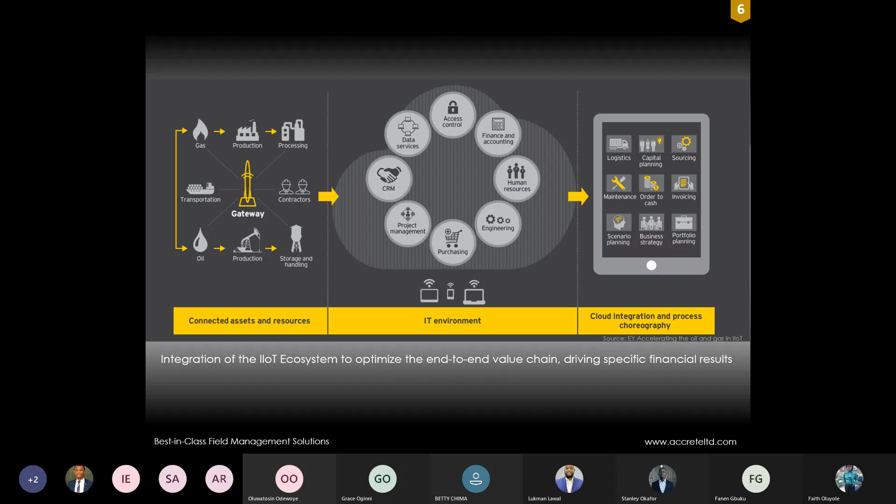So like I mentioned earlier, the common drivers for the move towards digital solutions in the oil industry have been, one, cost savings, right? And one of the key drivers for this drive towards operational cost savings has been low oil prices in recent years, and in a bid to reduce the cost of carrying out these operations, automation actually is one of the key drivers and one of the key tools that the industry is adopting in reducing the cost of operations, right?

So other added benefits of that would be having all the information you need to make decisions available to you in an instant or in real time and in the right context. Then production optimization, which is also one key aspect of this discussion today, is another key driver towards the digital transformation of many E&P businesses.

Then you also have the benefits of being able to reduce compartmentalized behavior that is typical with oil companies, where you have several disciplines working in their own silos. So once you have a platform where everyone can have the same source of the truth of the operations, then it reduces this tendency of different personnel in different parts of the business to work in silos.

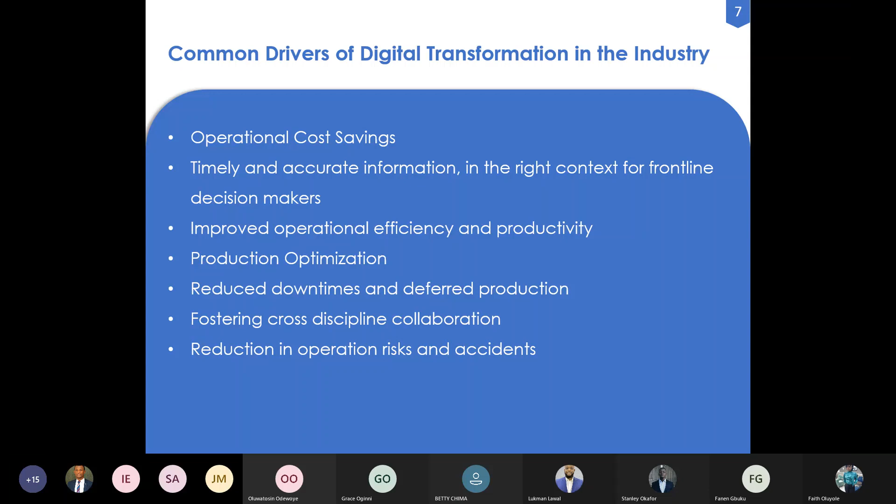Because if you don't have to commute to isolated distant facilities to acquire data, then the cost associated with that is reduced dramatically. The risk associated with acquiring those data also reduces dramatically, right? Because you don't have people being exposed to the typical high pressures that are related to operating oil and gas fields.

So, down to the core of the discussion, which is pretty much digital oil field. So the question is, what do we understand by digital oil field? Because the term is used a lot in the industry, it's thrown around a lot, and there are several meanings. Different people have different meanings of what digital oil field is about. Different vendors have different presentations of what digital oil field is.

But what we'll do now is, just to sample ideas, we'll try and send out a poll that should come up on your device. If you can just type a couple of words on what you understand by digital oil field, we'll give you a few seconds, say 10 seconds. We send out the poll, then type what you understand by digital oil field. Then we can take the discussion from there on our own understanding and presentation of the digital oil field.

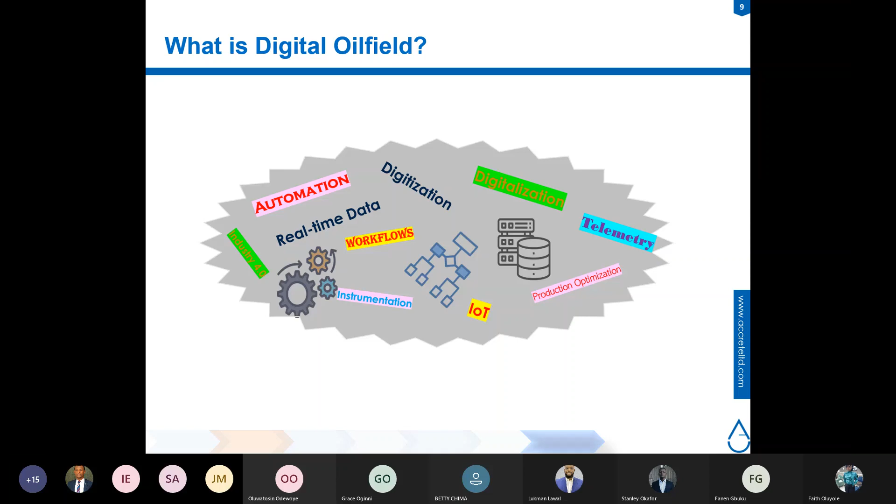like many people have mentioned here, a digital twin or a digital representation of your field, right? If you can have a digital representation of your field on a computer, then you can test out ideas on that digital replica. One, it's good for surveillance. Because we have sensors on the field telling us what's happening, whatever is happening on the field, we can see it in the digital replica of the field that we have on the computer.

Two, we can test out ideas on how to make things better on the virtual replica of the field before going ahead to implement them on the field. And we can also look at automating certain workflows, say a production optimization workflow or a flow assurance workflow. All this can be automated or tested out on the virtual replica before implementing them on the real field. Once we've tested the performance on the virtual replica, we go ahead and test it on the actual field itself.

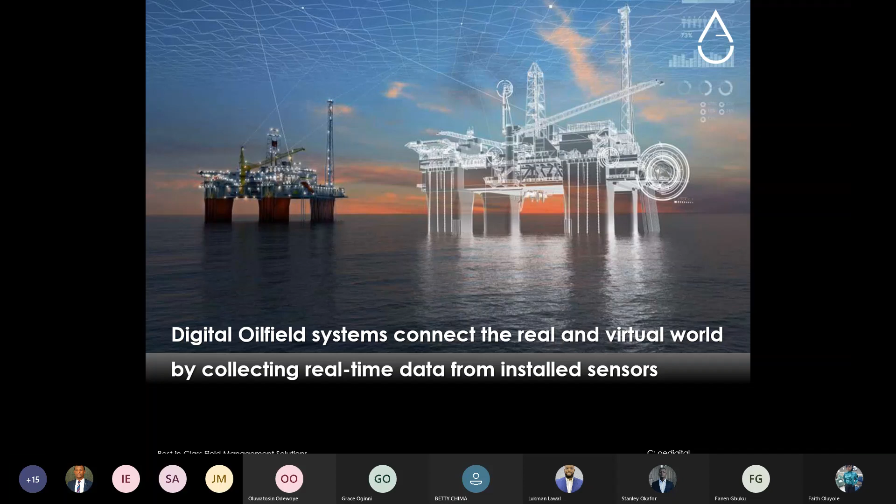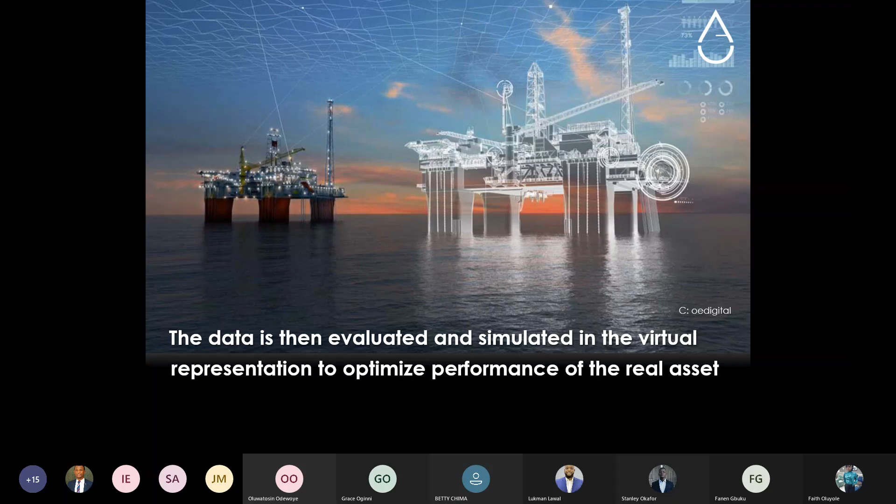So it's a way of having that real world in a virtual sense. In this example, we have the field on the left, and sensors at different points in the system. You can create a virtual replica of the field, which you can use to test out different ideas before implementing them on the field. That way, we can achieve measurable improvements and test them in the virtual world before taking them to the real world. We can anticipate issues before they happen, which means a proactive approach to managing field performance.

So I've outlined a few of the typical benefits that are available out there. These are publicly available information in terms of the key drivers we mentioned earlier, and a significant part of it is, one, cost saving. And there are some figures here from Shell.

I think there's an SPE paper available on this about Shell in terms of the value of smart fields over a 5-year period. I think this paper was written in 2010, and the estimate then was about $5 billion over a 5-year period. There's this study by IHS about the operational cost savings and all.

So with these potential savings in automating the operations of the field, companies are really driving towards transforming their operations and digitalizing them. Then there are other benefits that come with it as well: safety, improved operational efficiency, data being made available to decision makers in the right context in real time. So it means that at any point in time, we can make quick, sound field management decisions, and that brings a tremendous value.

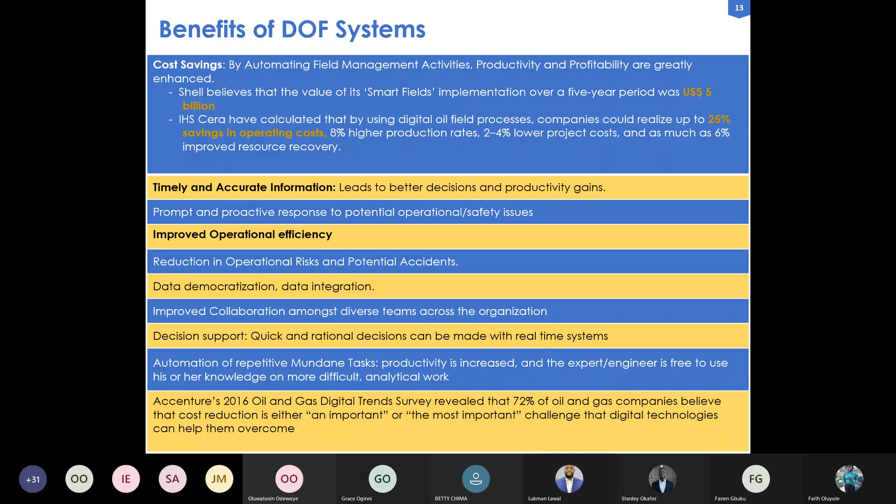So based on our definition earlier, there are several different technology components that come together to make up an ideal digital oil field from our perspective. So for you to be able to replicate the performance of your field, it goes beyond just having sensors on the field, right? Which is the instrumentation side of it. We should be able to have a physical model of the field or a simulation of the integrated field performance, with which we can integrate this data coming from the field. And on top of that, we can build workflows that replicate how we want the fields to be managed in an optimal manner, right?

So in terms of the technology components, there is the IT side of it, which many companies already have, or if the IT infrastructure is outsourced, there are cloud systems that can be used for that. Then there is the field instrumentation, where all the real-time data acquisition comes into play. So you have sensors on the field, at the wellheads, at the flow lines, at the separators, and these sensors are sending data into your database, your real-time historians, and we now have workflows that we can use to automate certain objectives that we want to achieve in real time, right?

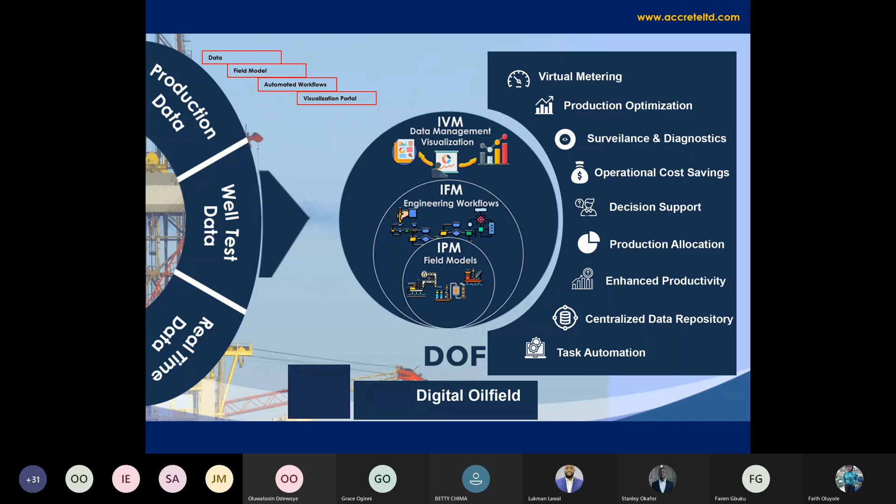So in terms of the instrumentation, we offer this service where the gauges are retrofitted to any asset, and the gauges are wireless, they are battery operated, and the batteries can last for up to 10 years with quite high frequency of data transmission. And the data is transmitted wirelessly to your on-premise historian, right? So with the real-time data alone, there's a lot you can already achieve. That's even before you integrate them with the model of the field that simulates the actual performance of the field.

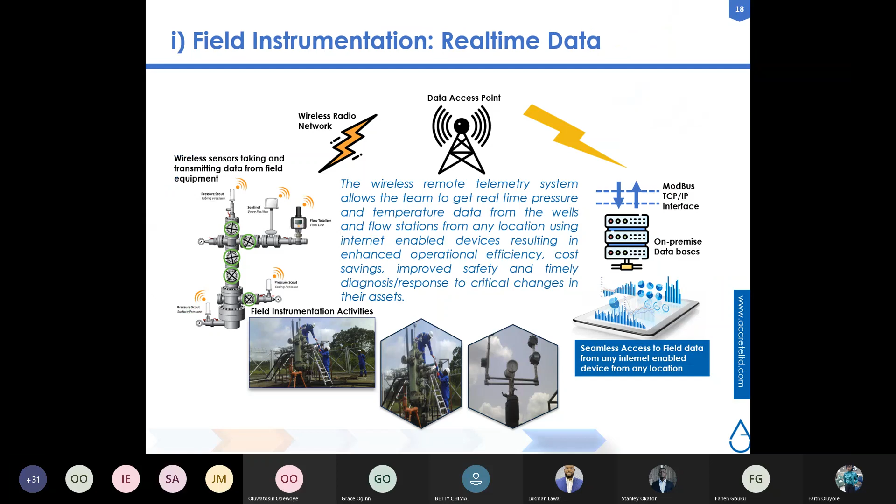The signature of these pressures, real-time data coming from the field, can tell you if a well is shut in, if a well is flowing, if there are data points that require your attention, right? And we can now build workflows on top of this real-time data and models of the well to have much more insight into the performance of the system. So that's the first component of the DOF system.

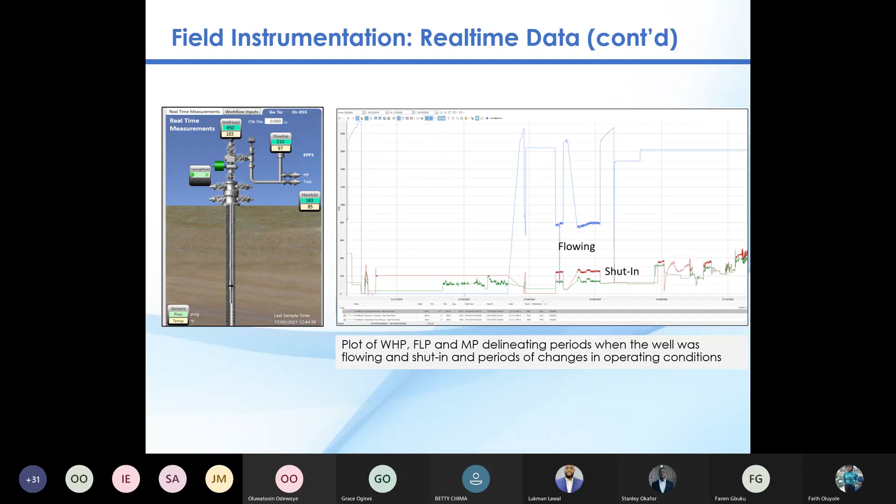So then, once the system is deployed, the real-time data, the integrated production model, the workflows all now work in the background at the back end of the system, and you have the results on a platform with different dashboards and different analytics that, depending on the role of the user, they can take advantage of.

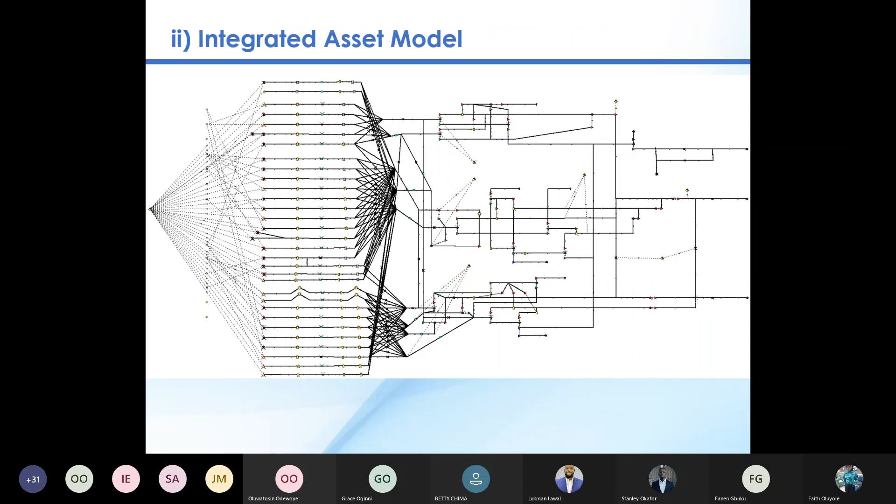So you don't have to spend 3 months gathering data, building models, before you can achieve these objectives. You can pretty much click a button and these objectives can be achieved in 5 minutes or 1 hour rather than 3 months or 6 months, right? Because you already have a model in place. You have real-time data coming and these models are being updated on the fly with all these workflows. So you can focus on achieving business and engineering objectives, rather than data management or acquiring data and building models.

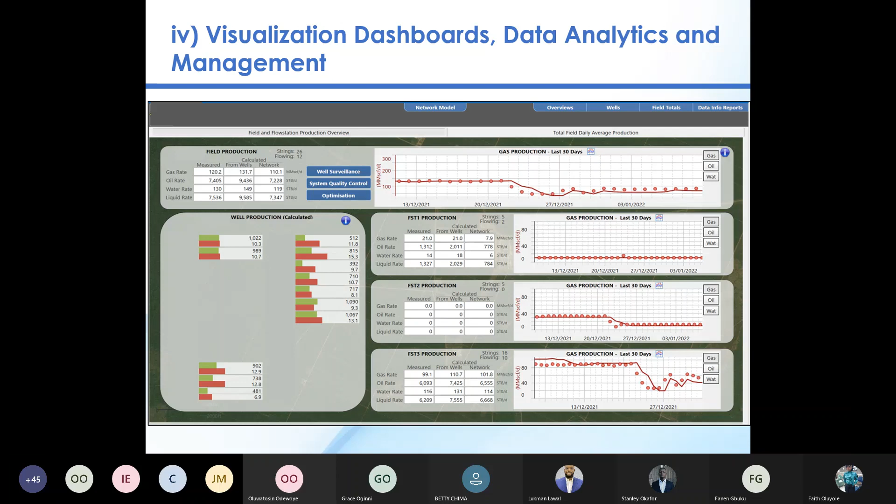So in a nutshell, the digital oil field offering from Accrete and our partners combines your real-time data, integrated production models, and workflows for automating different tasks depending on what you are interested in, and also a visualization and analytics platform for day-to-day field management and decision making. So it pretty much gives you an online real-time field management system that everybody in the organization can take advantage of.

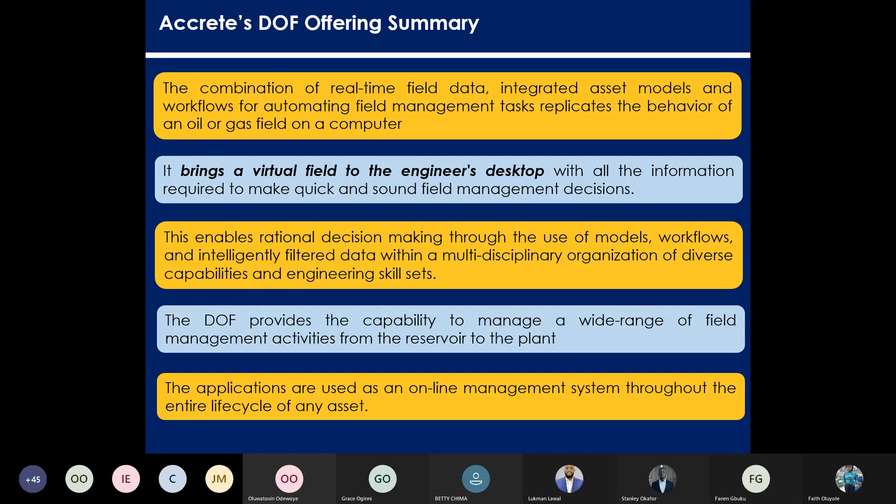So what we'll do now is spend the rest of the time, the 20 minutes that we have left for the presentation, to go through a case study and see how there was an objective and how we were able to bring all these different components that make up a digital oil field together to achieve the objectives, right?

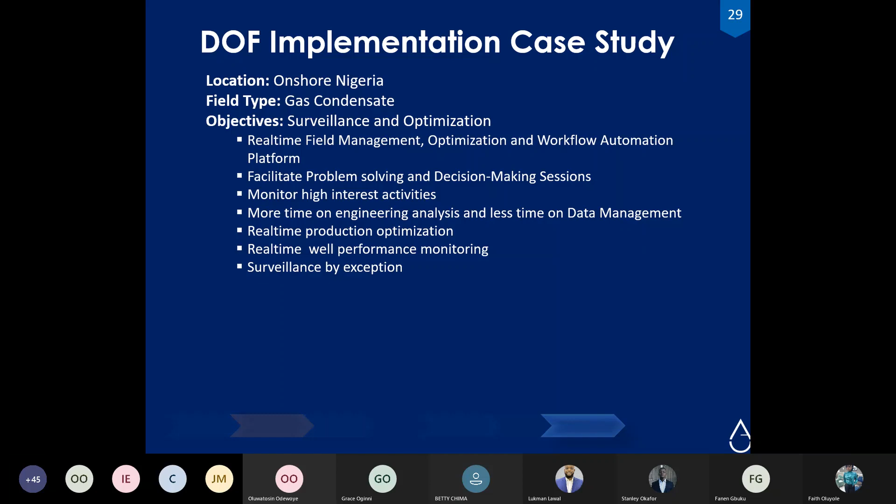So this is a case in Nigeria, a gas condensate field. There are several objectives, but once we looked at all the objectives, they fit into two major categories: surveillance and optimization. So you see objectives like real-time field management, workflow automation, facilitate problem solving and decision making, surveillance by exception, real-time well performance monitoring, and all that. But in terms of the high-level objective, it fits into two major objectives, which is optimization from our perspective and surveillance.

So now, in terms of the architecture for achieving these objectives and bringing this system into the real-time domain, one point I would like to make is that prior to this, there was really no integrated model for the field. There were a few well models here and there, a few reservoir models here and there, but there was no model that actually captured the entire field performance. So this was a first.

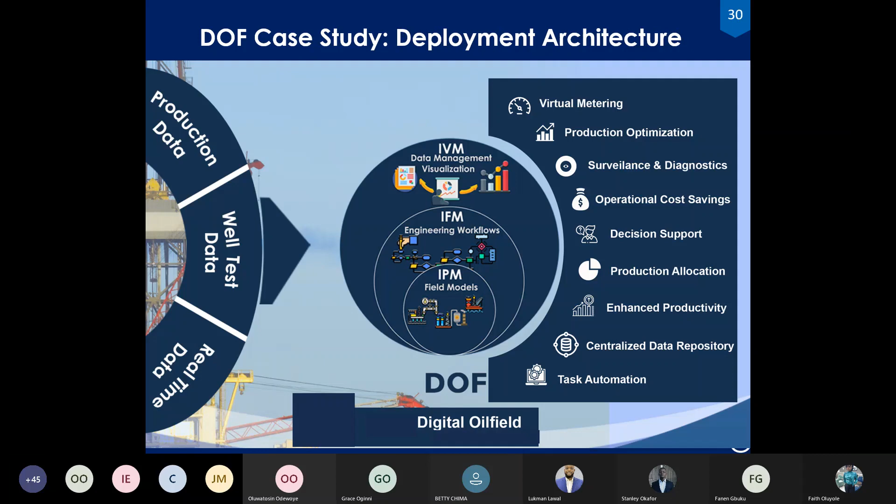So the starting point: there was no model for this field. So how do we get this field from not having a model to being able to achieve objectives in real time? The very first thing is to build an integrated model for the field. The integrated production model goes by several names: IPSM, IPM, IAM.

But it's pretty much a model that integrates the reservoir performance with the wells and the flow line network or the surface facilities. So we have that integrated model built. At this point, the model is offline. But even as the model was offline, we're able to achieve all these objectives: choke size optimization, routing optimization, generated optimum well operating envelope and all that.

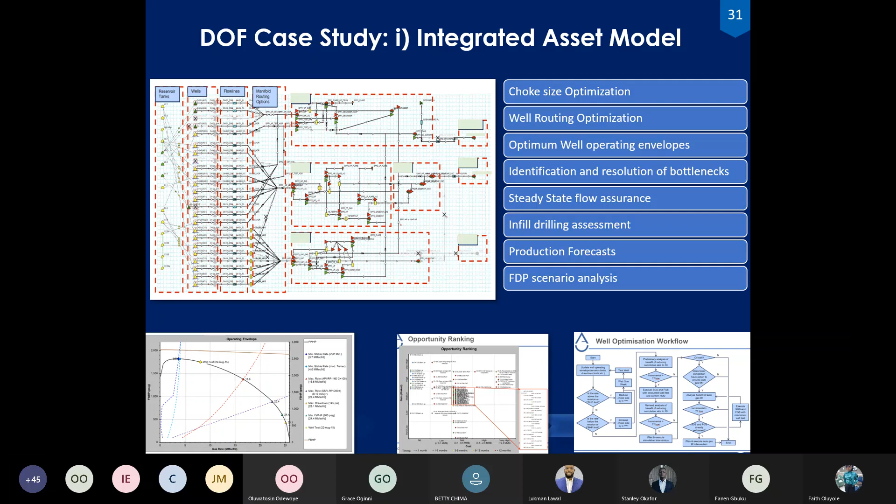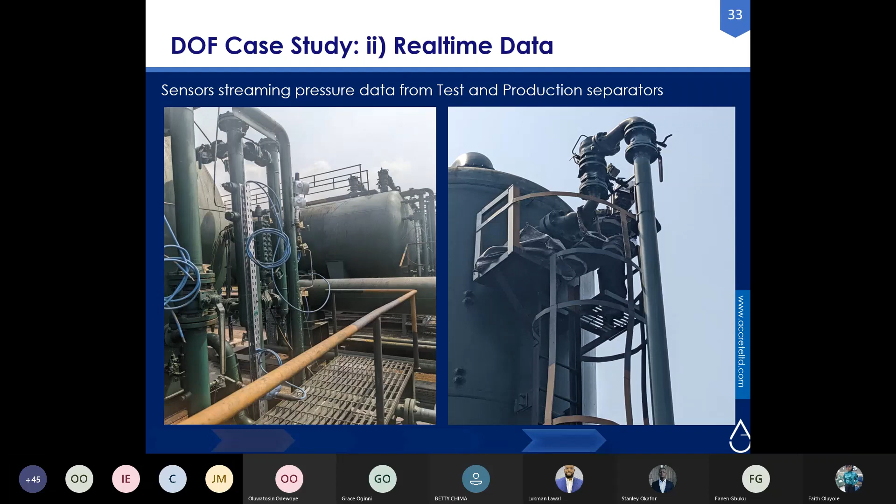The gauges blend into the system. They pretty much look like any other installation, so they don't stand out and attract so much attention, because some of these areas could be quite prone to vandalization. With those gauges installed, the data could be trended, like I showed earlier, and the trending of the data alone can already give you some insight into the performance of the system and bring tremendous value in terms of surveillance.

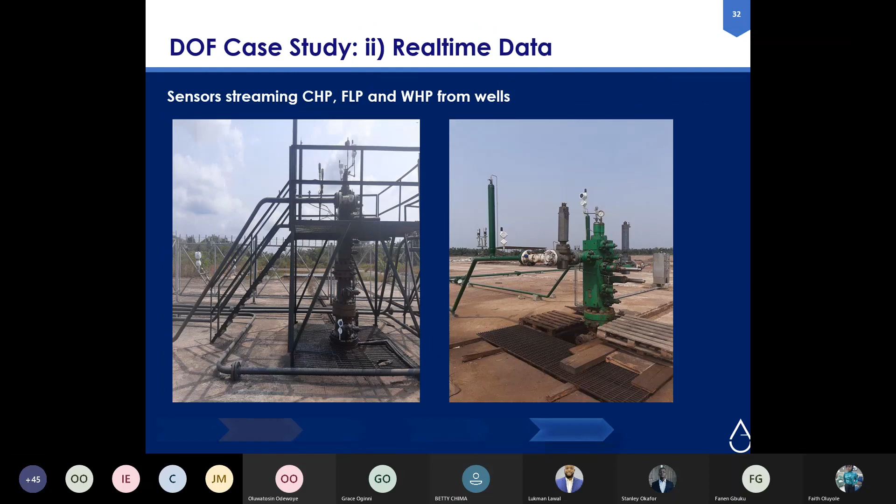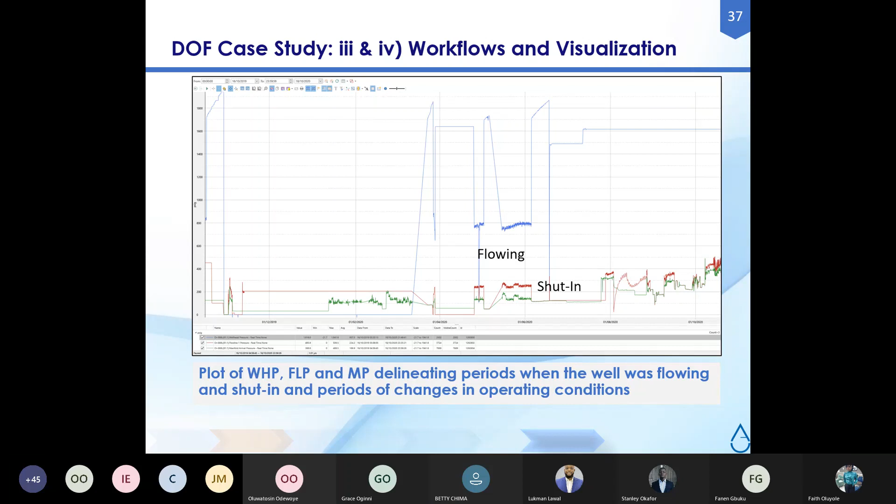So then we have production optimization advisory in the system. Because we have the GAP model underlying the system, people that are familiar with GAP know that you can solve the GAP network by choosing an optimizer. So let's say, optimize with all constraints or optimize with potential constraints. Because the GAP model is at the back of the system, and we have real-time pressures for the separator coming in, we also have real-time wellhead pressure and flow line pressure. The GAP system can be solved at designated times, let's say every hour or every 30 minutes.

And it can tell you, based on the wells that are online now, based on the routing of the wells, you can get this more oil right now. You can get this more gas right now. And the good thing about the optimizer is it penalizes water production. So it means that even with more oil and gas production, you are getting less water, right? So if the routing of the well changes, the optimization calculated will change. If more wells come on stream, the optimum point changes. So this is pretty much the real-time production optimization feature of the system.

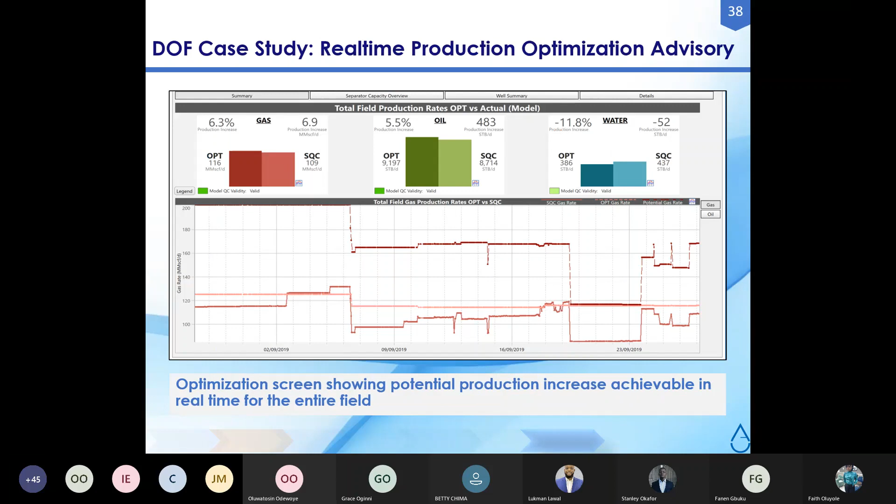And this is because we have a simulator, a replica of the field at the back of the system, solving at designated times. So apart from just telling you that you can get more, it actually tells you how to get more. In this case, what the system is doing is choke size optimization, right? And it's telling us, for you to get optimum, these are the choke sizes that you should adopt, right?

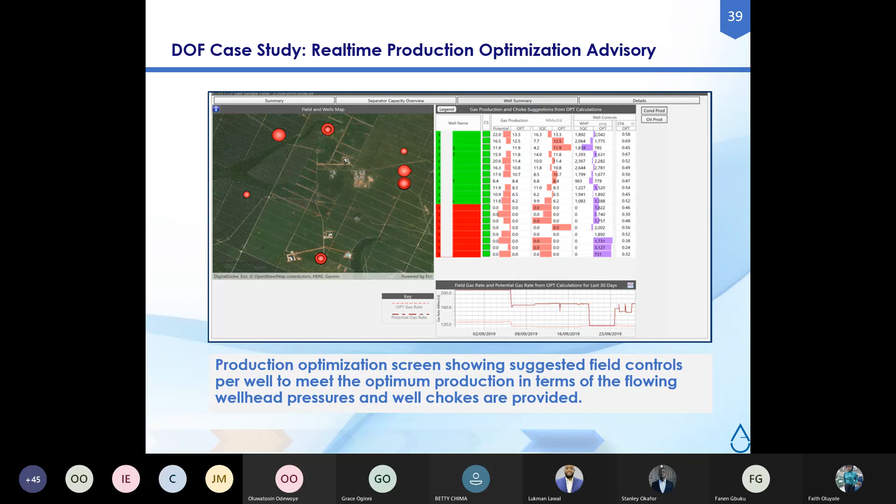And if you look closely, you see that in some cases, it's actually telling us to choke back some wells because those wells, their pressures are so high that they are actually backing out some other wells. So in order to optimize the production, it's telling us to choke back. So it's not in all cases that it actually tells us to open up the wells. So the system is that smart.

So then there's the well test management feature, right? Because the wells are instrumented at the surface, you have the wellhead pressure, the flow line pressure coming in. If the test separator is also instrumented, then you can see the rates in real time on the system as well. So it means that as the test is being conducted on the field, you can actually open up the platform and you can monitor the test that is being conducted. You can trend it. And once you have a stable trend, you can pretty much acquire a set of test data.

So before the test is done manually on the field and the results are collated and all that, you already have a record of the test data, all because the real-time instrumentation is there and the platform is there for you to now capture this test data and just start the analysis right away and start using it as input into other analysis.

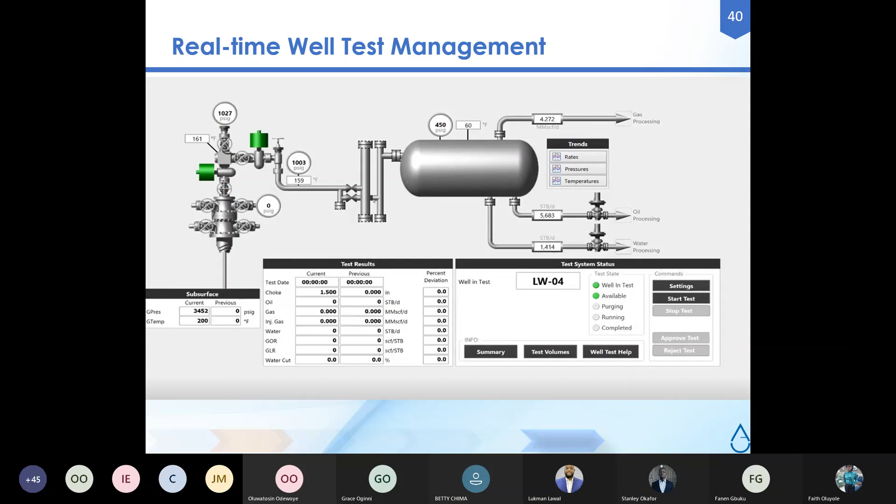Then the system also gives you, like I mentioned earlier, a facility to store the test data. So all the historical well test data in the hydrocarbon accounting tool or any database that you're using for well test can be pulled directly on the platform. Then you can see, oh, what's the last valid test? And what's the latest test? What's the test date? Then you can generate a report of the test history, right?

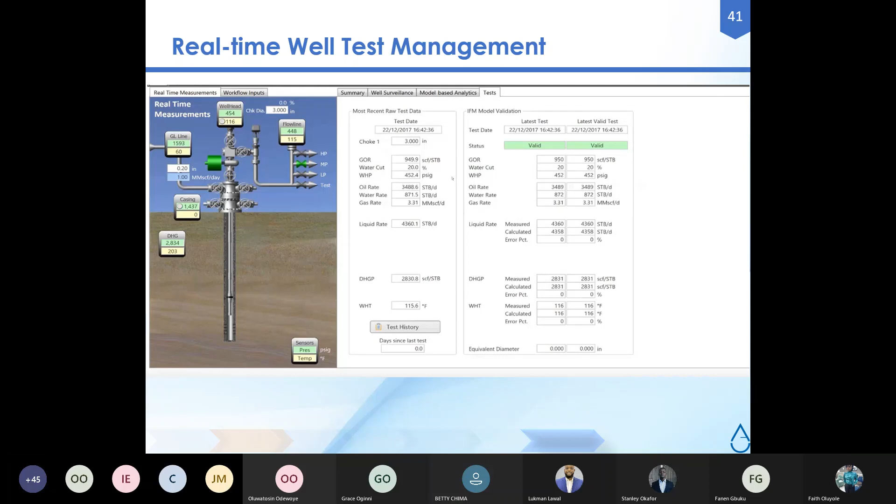So if the model is still valid in terms of matching what is coming real time across the network, then it gives us more confidence in the virtual metering results, optimization results, and other objectives that we've built into the system.

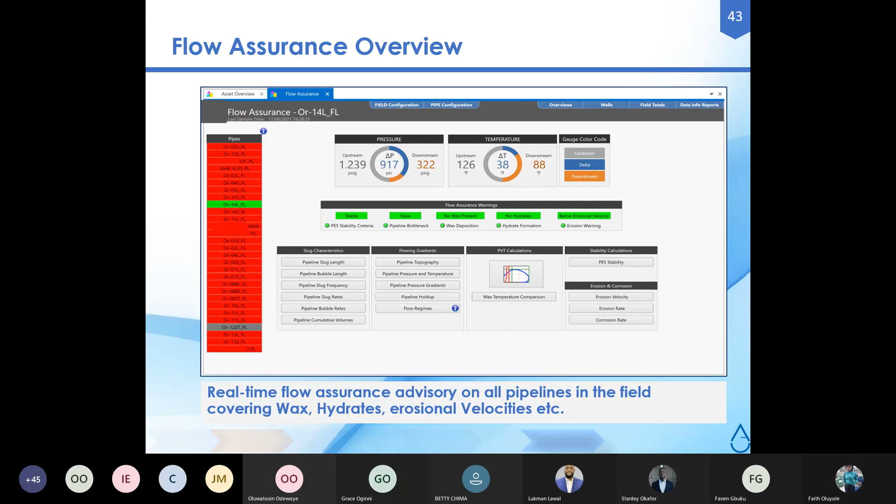Okay, so we'll be rounding up shortly, just so that we are within our planned time. But before that, we'll just ask a couple of questions, right? Just to test what we've been discussing so far. So we'll just send two questions across.

The first one is in terms of automating repetitive tasks or field management tasks, right? It's a multi-choice question, so just click on the answer. Companies can automate mundane tasks using which aspect of the DOF system? So just pick whatever answer you feel is correct.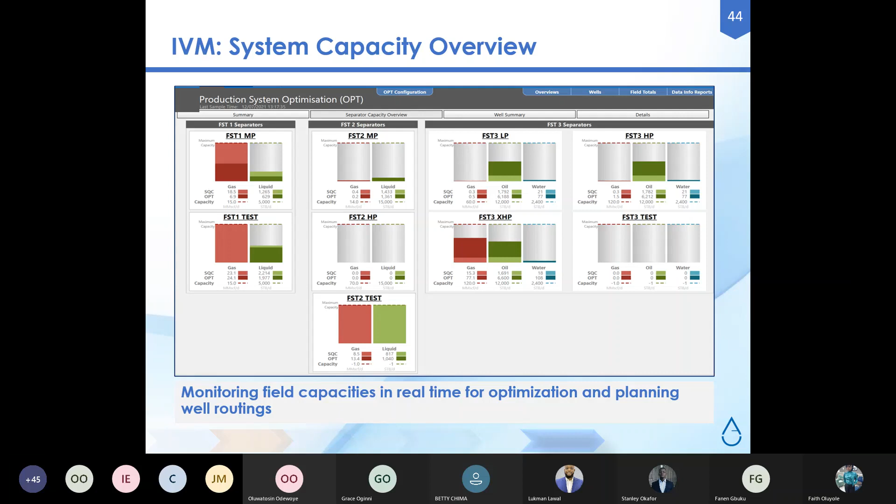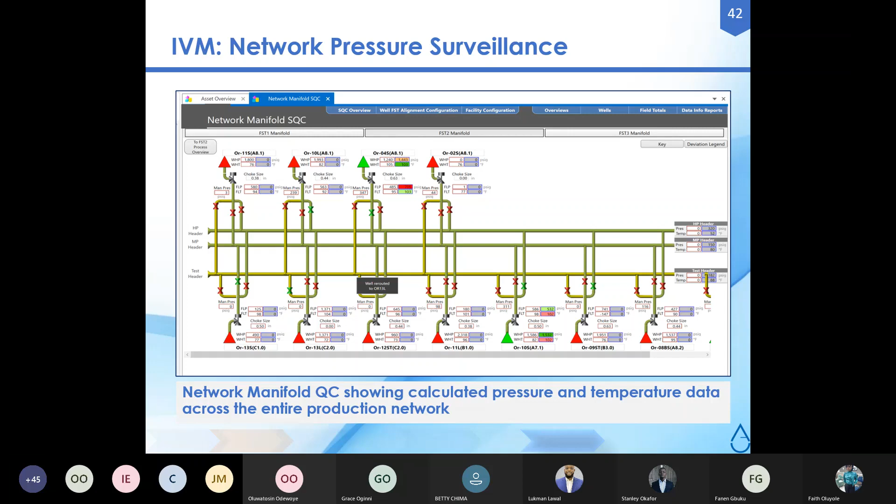So what we'll do now is, we've pretty much covered all the content we have for digital oil field. What we'll do is maybe before the questions, I can once again reiterate what a digital oil field system is, right? It should be a system that should be able to replicate the performance of the field on a computer, more or less like a digital twin of the field, with which we can do things and control things in the virtual world before taking it to the real-time domain.

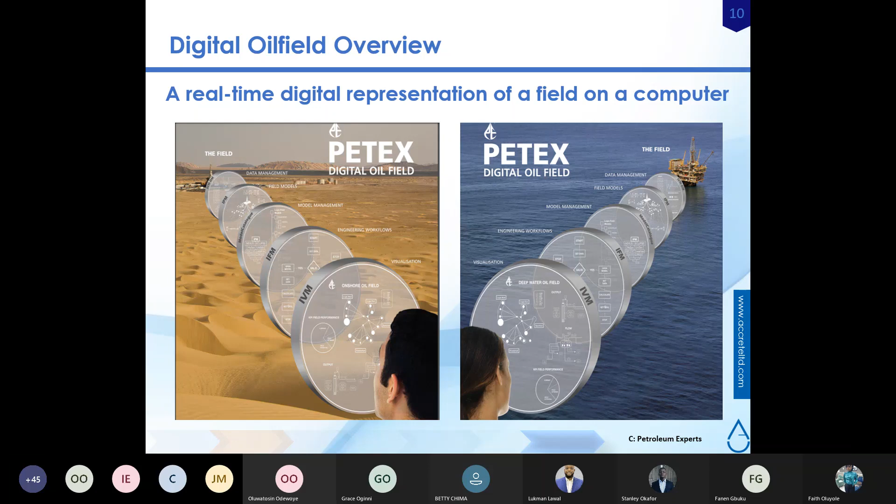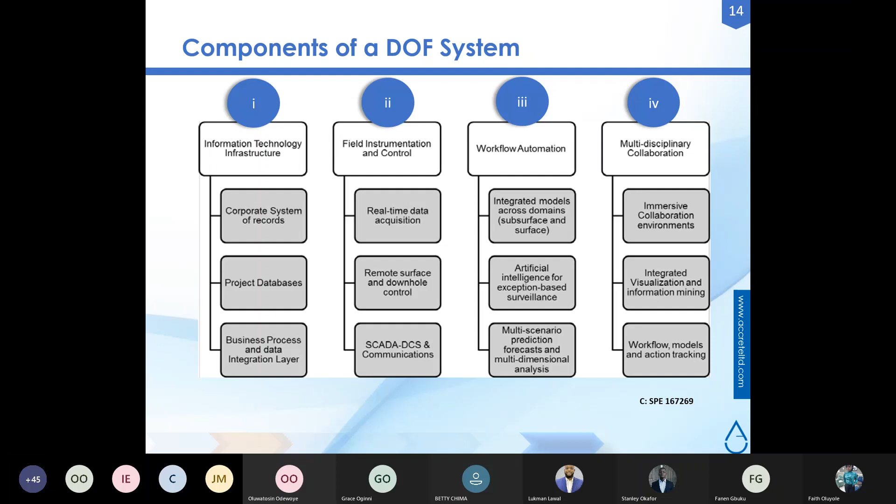Then what are the technology components that come together to make a digital oil field system? Field instrumentation, workflow automation, and a collaboration platform or visualization platform. Then what is a typical DOF architecture? We should have a way of modeling the system, and a system for managing the data, a system for managing the workflows, and also we should have a platform for collaboration and visualization.

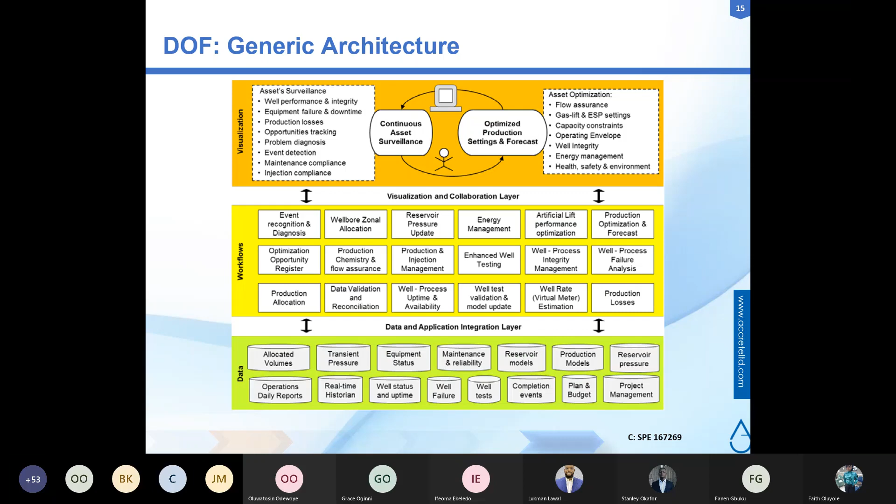So then we talked about Accrete offering, and in terms of all these components needed to deliver a robust digital oil field system, we offer all the services, in collaboration with our partners. So field instrumentation for the real-time data, integrated asset model or integrated production model or IPSM, right? So this is bread and butter of what we do. Then workflows to automate your field activities and business processes. Then a platform for visualization, right? And collaboration. So with that, we can pretty much start looking at taking questions.

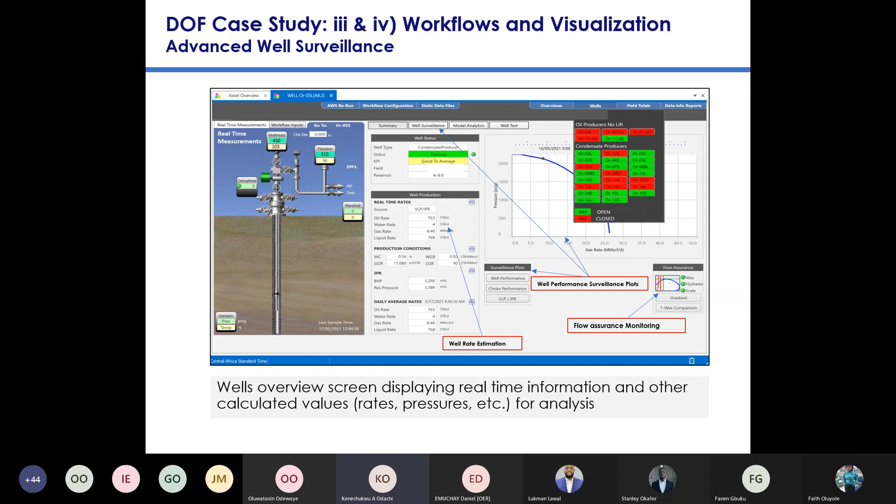Okay, my question was, do you have an idea of any device that can do this? No, I don't. Okay. Thank you.